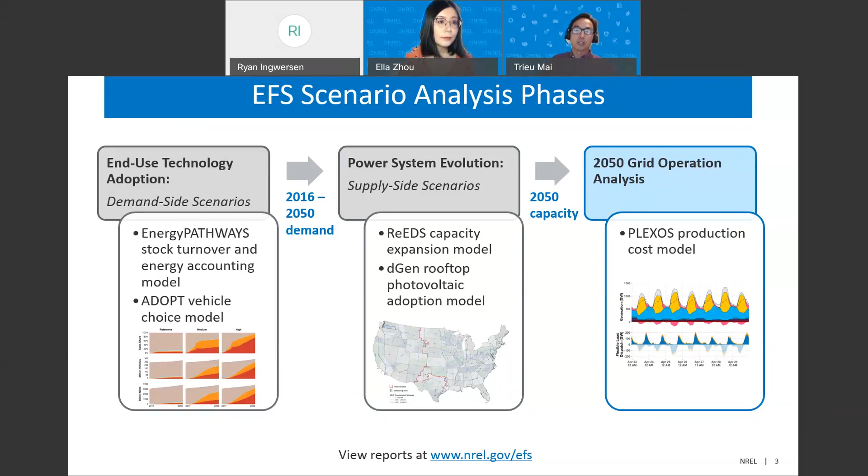And the purpose of the left-hand side here is because these long-term models necessarily need simplified representations of very complex things. So we're essentially modeling directly the unit commitment economic dispatch problem to handle the greater amount of renewable energy, greater amount of flexible loads on an hour-to-hour basis to examine some of the resource adequacy and reliability questions associated with these high electrification scenarios, as well as giving a better estimate of the value of some of these flexibility and integration questions. Okay, so that's the general flow.

I hope that was clear in terms of the linkages across all the modeling efforts and where it leads us to today. I wanted to also provide some quantification so you have some better context on what we mean by high electrification, what we mean by higher renewables and the like.

So starting with this chart, which is from our 2018 demand side analysis, you can see historical as well as projected annual electricity demand across all the sectors, industry, residential and commercial, and transportation. You can also see that what we refer to as high electrification at the very top there is largely driven, not entirely, but largely driven by vehicle electrification, at least on an annual electricity demand basis, such that overall demand reaches 6,700 terawatt hours by 2050, a significantly faster rate of growth than we've experienced in recent history, and especially compared to our reference scenario.

We don't model the medium scenario in today's analysis, so in the interest of time, I'm going to skip over the details there, but really it's those high and reference scenarios that we'll be looking at. Of course, power system planning and power system operations are dependent not only on the total amount of electricity demand in a year, but also the shape of that demand on an hour-by-hour basis, et cetera. So what we note here is in these high electrification scenarios, the impact is such that there are greater, sharper, and more frequent peak demands. This has a lot of implications for integrating renewables and the value of flexibility, including demand-side flexibility, which Ella will get into.

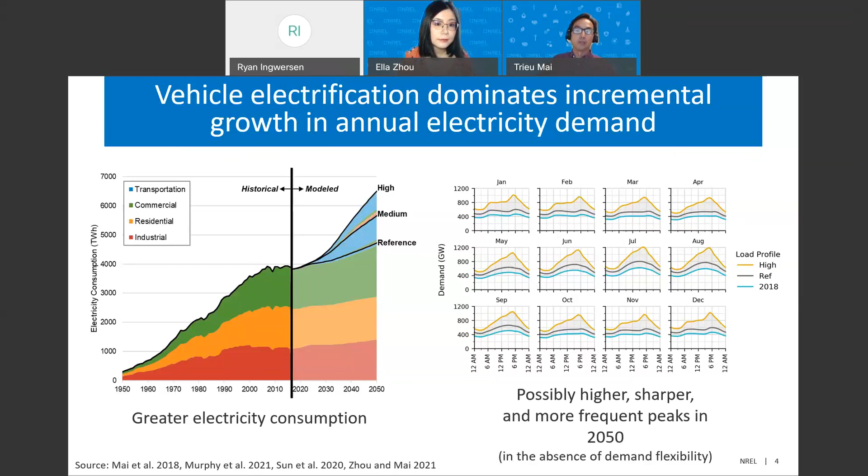A little bit more on the peak load, because the previous slide really emphasized vehicle electrification's impact on annual demand. We just want to note that, again, it's not just the annual values, and it's not just those total bulk numbers that are important, especially when looking at the operational aspects of electrification. So what's shown here is, from these high electrification scenarios, a shift away from just summer peaking demand to a wider range of peaks and a variable range of peaks across the seasons and months. And that's in large part driven by electric space heating needs under these high electrification scenarios, particularly in the northeastern regions and across the Midwest as well.

So what's shown in the maps is the magnitude of annual peak load. That's the size of the pie. The distribution of the pies are the top 100 hours and what season they fall under. And again, you see a shift in our model results from 2015 to 2050. A greater amount of blue in those pie charts represents a greater amount of winter peaking in those states, primarily in the colder latitudes in the eastern side of the country.

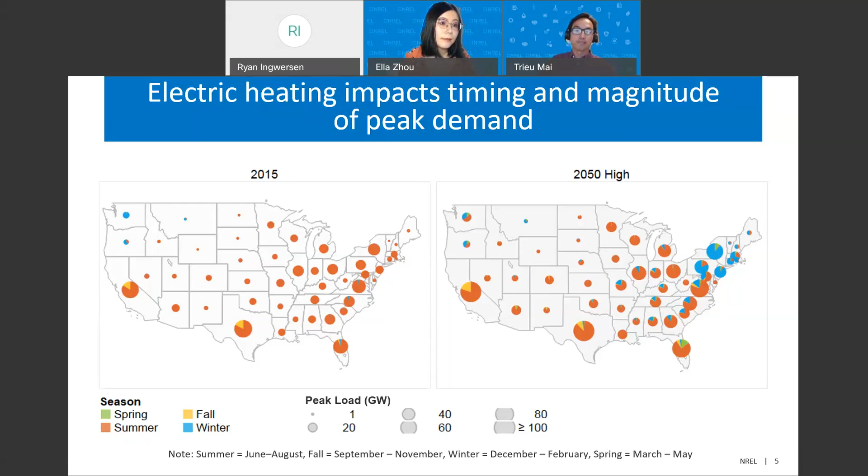Okay, so that's the demand side scenarios. What we're taking from the supply side scenarios is the generation capacity mix, as well as the transmission capacity developed and modeled using the ReEDS model. There are actually three main scenarios that we're looking at. Starting at the bottom is the reference scenarios. That's what REF stands for. And this is essentially our current policy scenario projected through 2050 using our moderate technology assumptions.

And from this scenario, you can see a substantial increase in wind and solar capacity, but also a substantial amount of existing and expansion of natural gas capacity in particular under these business as usual, if you will, environments. The next group of scenarios, the middle three there, labeled as high, refers to high electrification. And largely speaking, the capacity mix is very similar to the reference scenario, although the magnitude is much greater to accommodate the greater amount of overall electricity demand, as well as the greater peak demands as indicated there.

Finally, the top three scenarios are what we refer to as high RE. So high referring to high electrification, high RE meaning high amounts of renewable energy, predominantly from variable renewables. That's wind and solar in the blue and yellow there. The driver that we looked at to generate the scenario is using low renewable and battery storage costs from our Annual Technology Baseline. And not surprisingly, you get greater amounts of installed capacity in the renewables sectors, as well as in storage. You get a reduction in natural gas capacity relative to the high, standard RE scenario in the middle group, but nonetheless, you could see the differences there.

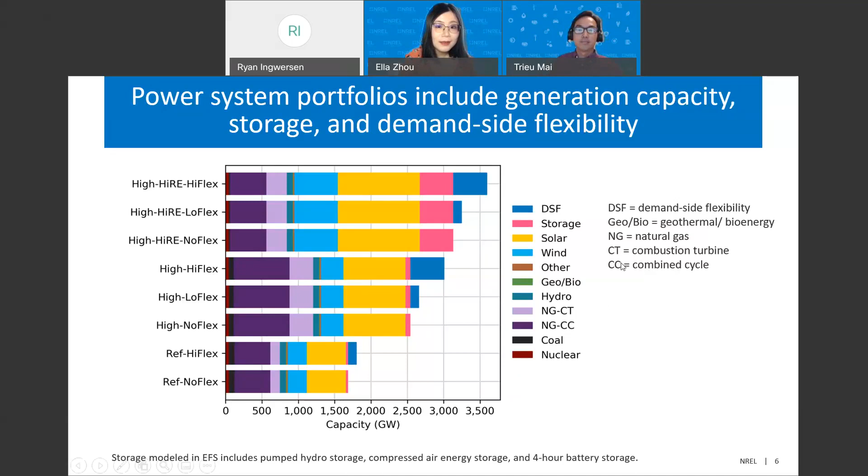Can you hear me now? Yes. Okay. Thanks, Trieu.

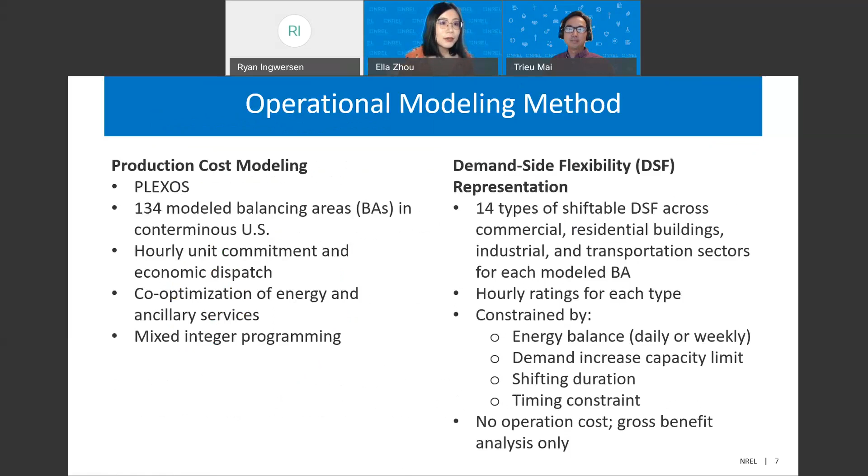So we use PLEXOS to investigate whether hourly electricity demand and operating reserves can be met, and the trends in electricity prices, regional power exchange, renewable curtailment, and other operational impacts. PLEXOS is a commercial production cost model developed by Energy Exemplar. For this study, we use PLEXOS to develop hourly grid simulations for the ReEDS system built in the previous EFS studies like Trieu has just introduced. It has the same geographical resolution as ReEDS, but with hourly unit commitment and economic dispatch and more granular representation of different types of demand-side flexibility.

Unit commitment and economic dispatch means determining when each unit will be on and off and at what level it will be operating for each hour under a range of physical and resource constraints to meet the electricity demand at the lowest operating cost. So we model 14 types of flexible loads. Here we can see a breakdown of the total annual 2050 flexible loads by sector in our high electrification, high flexible loads scenario. And it amounts to about 17% of the total load.

Similar to energy storage, demand-side flexibility in our model can shift energy consumption from one hour to another, and it can provide operating reserves. But it is also different from storage in that it is constrained by a variety of factors, including the time series availability, the fact that end-use service must be provided at the end of the day or end of the week, and other specific demand constraints.

For example, let's say I have a water heater. I probably don't care if it kicks off at 4 in the morning or 6 in the morning, but the service has to be provided at some point of the day. Otherwise, the result is I won't have hot water for my shower. So demand-side flexibility is a lot more restricted than storage. Even though we see 17% of the load being flexible on an annual basis, they're not actually available all day, every day, and when we actually want it.

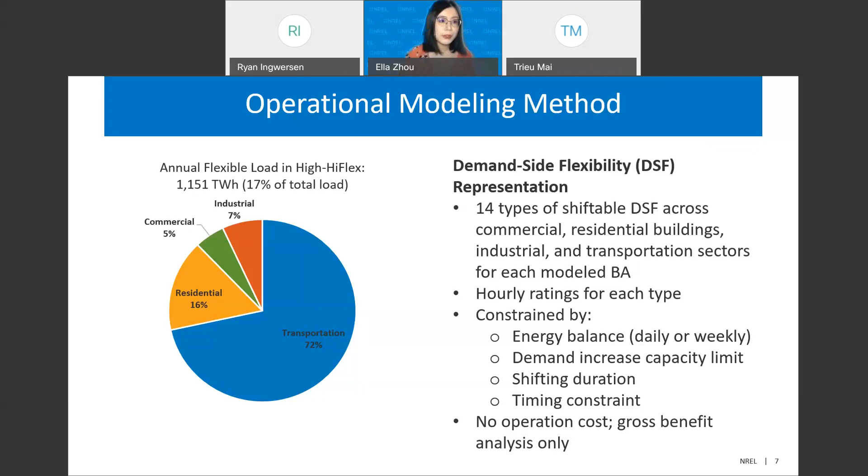We have three research questions we're focused on. The first one is, how do future power systems operate to serve electricity demand with new and changing loads from widespread electrification? For this question, we'll look at the scenarios with varying levels of electrification, but without demand-side flexibility. The second question is, how might flexible loads be dispatched and how do they impact system operation? For this question, we'll compare the high electrification scenario with and without demand-side flexibility to see how that works.

The third question is, how do flexible loads operate in high renewable, high electrification futures, and what's the value of their flexibility? So for this question, we'll compare scenarios with two levels of renewables, 43% and 66% nationally, and see how flexible loads work in concert with the renewables.

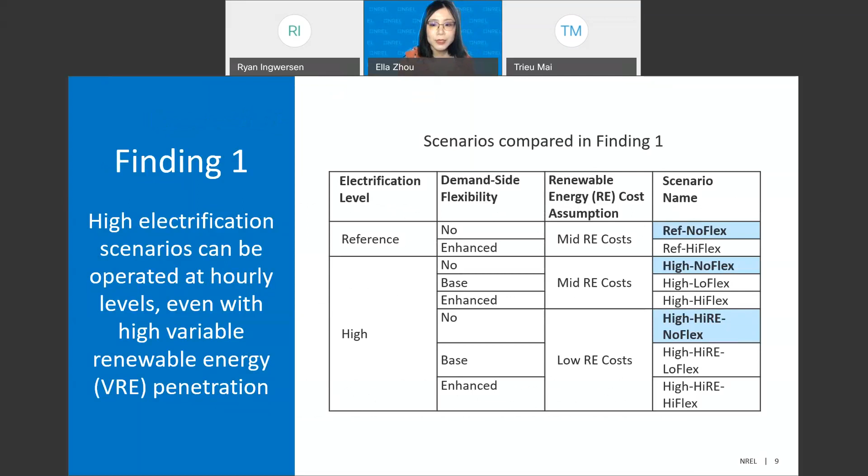The answer to our first question is yes, high electrification scenarios can be operated at hourly levels, even with high variable renewable energy penetration. The table here highlights the scenarios we're comparing in this section, which is the reference electrification, high electrification, and high electrification, high RE without demand-side flexibility. The modeling shows that the portfolios built in ReEDS are resource adequate. It can serve more than 99.99% of the load and 99.96% of the operating reserves at hourly resolution in all 2050 scenarios.

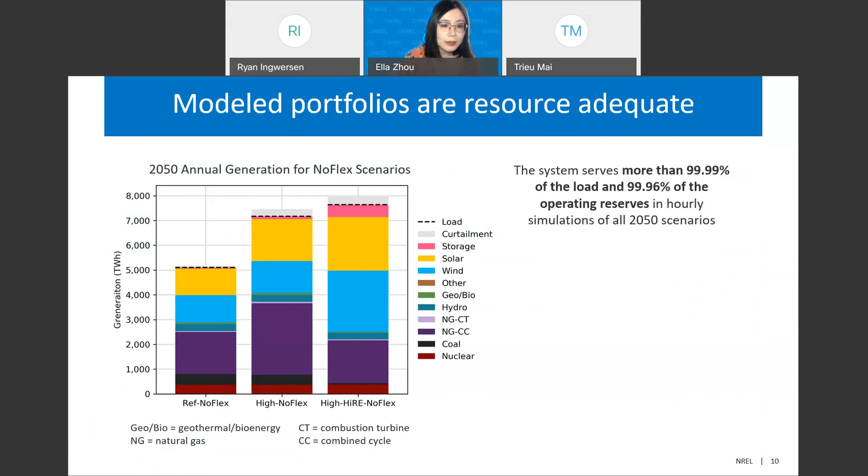And on the left figure, hold on. I want to get my pointer.

Okay, there we go. On the left figure, it shows the three annual generation bars from our modeling results: reference electrification, high electrification, and high electrification, high RE without demand-side flexibility. Variable renewable energy, which we define as wind and solar PV, amounts to an annual average of 66% of generation in the conterminous United States in the high and the high RE no flex scenario.

But this by no means implies that's the highest renewable penetration the system could achieve, because low carbon and other scenarios, for example, can drive even greater renewable penetration. For our purposes, the study demonstrates that the system can serve the load and operating reserves at hourly timescale under high electrification and relatively high renewables.

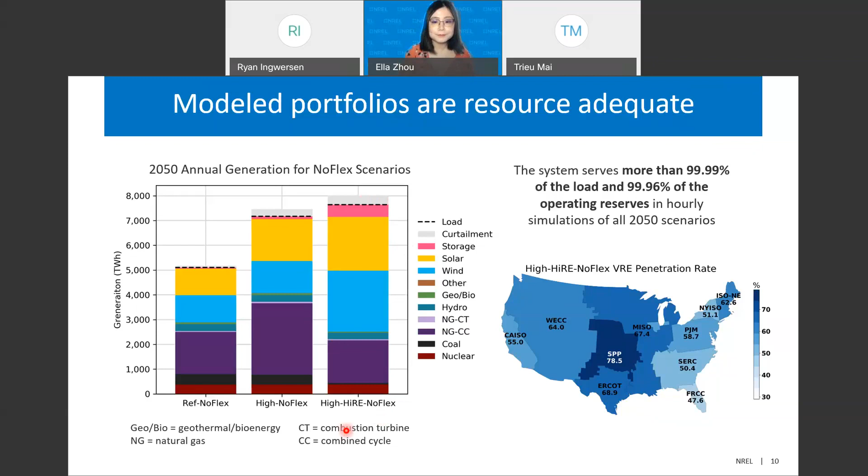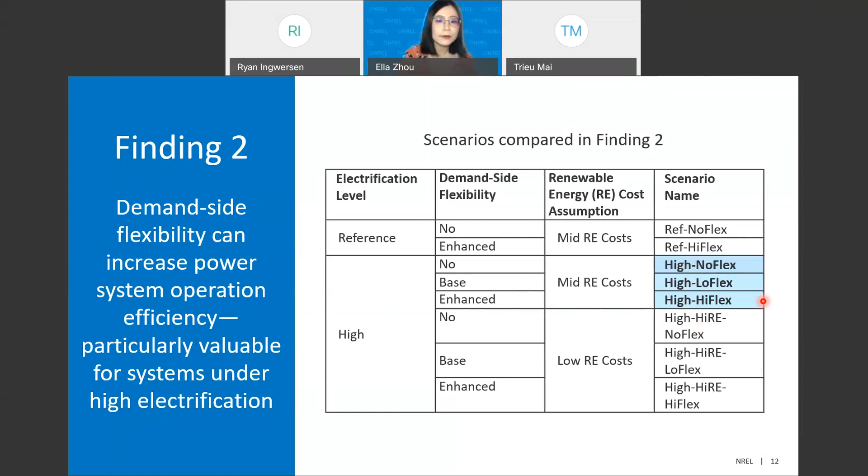Demand side flexibility increases power system operation efficiency and reduces system operating costs, primarily by increasing demand during low price periods and decreasing demand during high price periods. This load shifting helps increase utilization of generators with low operating costs and avoids turning on higher cost units.

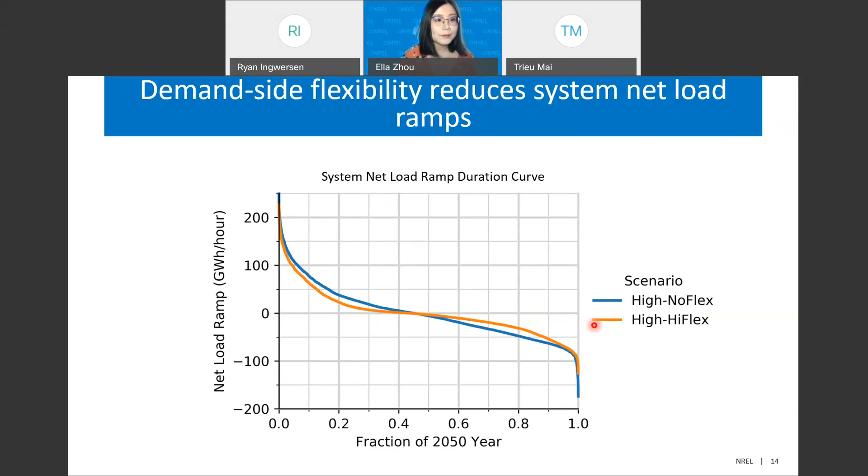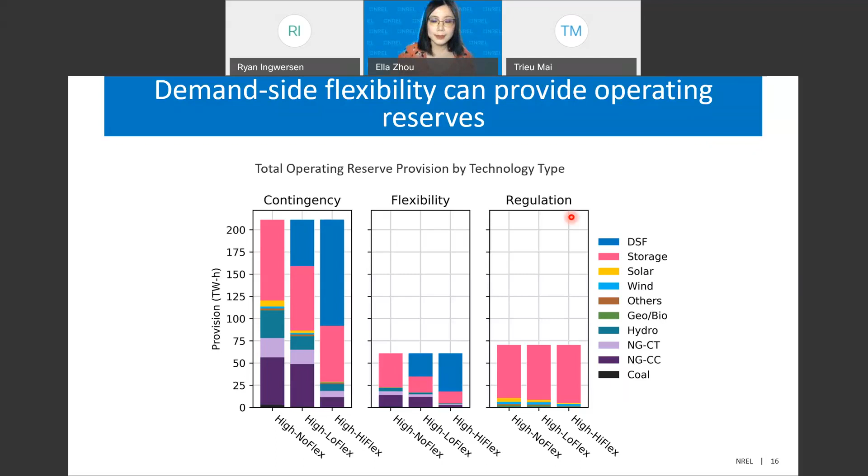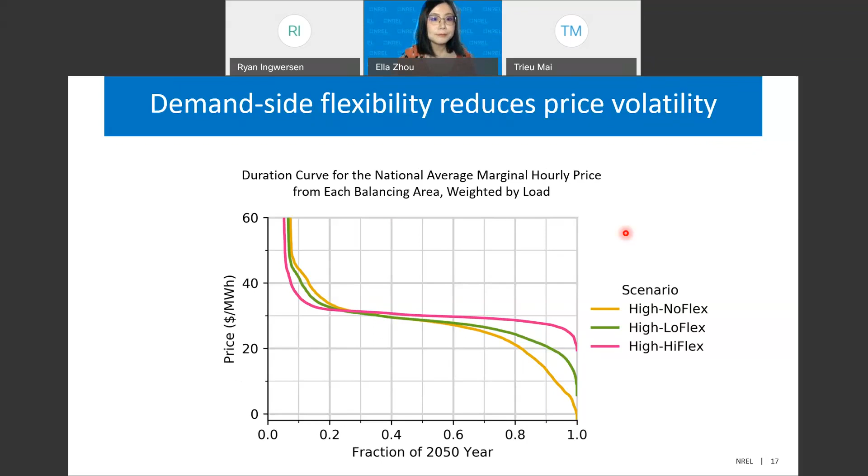Do we have any clarification questions? No, I think there are some questions about assumptions around flexibility, but I think it'd be better to group them at the end. So please proceed. Okay.

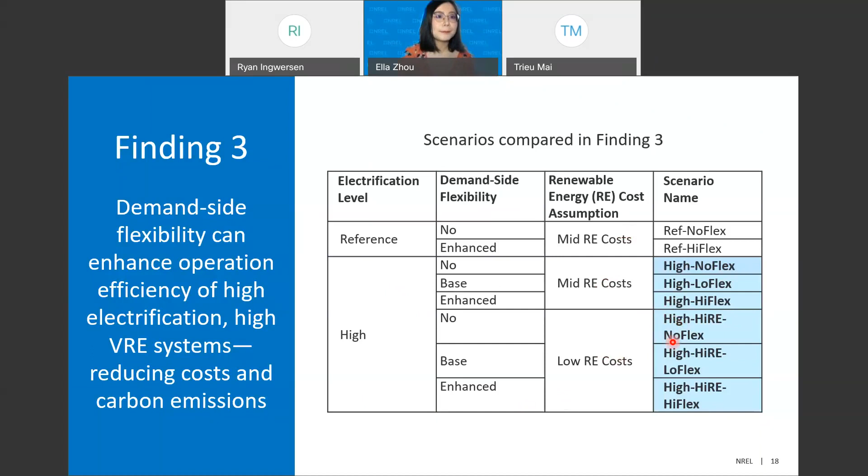So our third finding is that demand-side flexibility can enhance operation efficiency of high electrification, high VRE systems, reducing costs and carbon emissions. For this one, we're looking at only high electrification scenarios with different levels of renewable energy and different levels of demand-side flexibility. We find that flexible loads can reduce renewable curtailment. The average post-curtailment national VRE penetration in the high electrification scenarios is around 43%, and in the high electrification, high RE scenarios around 66%. A lot of curtailment happens in the springtime, when the demand is low. And in both sets of scenarios, the addition of demand-side flexibility can lower curtailment.

So the top figure shows the high electrification scenarios with varying levels of demand-side flexibility. The bottom figure here shows the high electrification, high RE scenarios with varying levels of flexibility. So you can see with additional flexible loads added, curtailment always goes down. In total, high levels of flexible loads can reduce curtailment by around 16 to 18% in these scenarios.

But the spring curtailment, as you can see, remains pretty high because only daily shifting or weekly shifting demand-side flexibility is considered in our modeling. This suggests that maybe longer duration sources of flexibility, such as long duration storage or electrolytic hydrogen production, might have potential here depending on their costs.

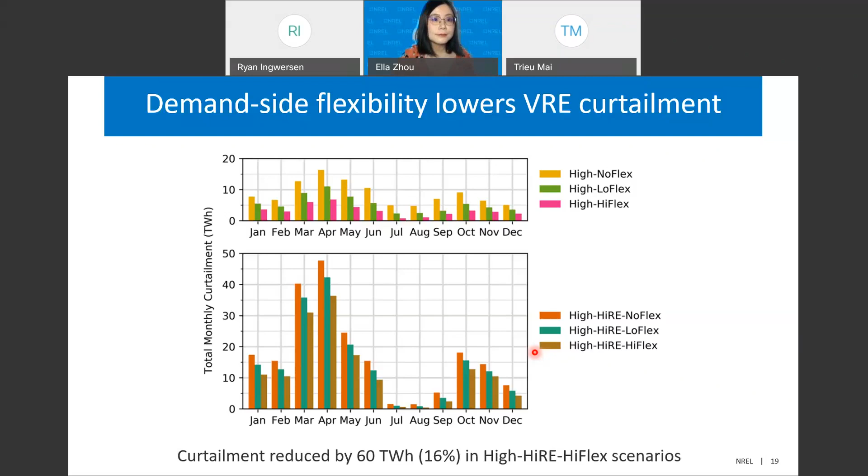Overall, we see that demand-side flexibility can effectively lower system operation costs by using more efficient units, reducing VRE curtailment, reducing system net load ramps, and thermal cycling. This amounts to around 9% of total system operation costs in the high electrification scenario and 10% in the high electrification, high RE scenario. Note that the high electrification, high RE scenario in itself is less than half of the total operation cost of the high electrification scenarios, mainly because of the savings in fuel costs.

The gross value of demand-side flexibility, without accounting for costs of implementing and operating it, is around $4 to $16 per megawatt hour of availability, and that is the total system saving divided by the total annual amount of available flexible load. Or the value could be $8 to $22 per megawatt hour of energy shifted. So that is the total system cost saving with demand-side flexibility divided by how much energy is actually shifted during that year. This value of demand-side flexibility diminishes as additional flexibility is added.

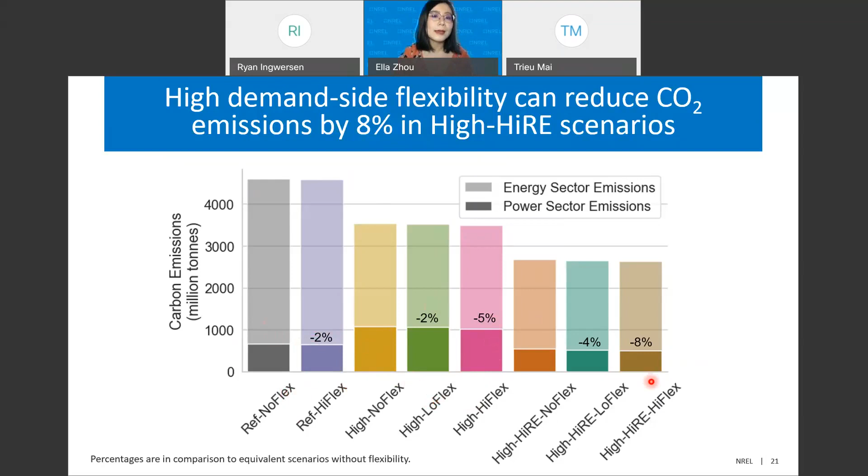We find that flexible loads can enhance the ability of VRE to lower CO2 emissions in electrification futures. The percentage differences marked here are in comparison to equivalent scenarios without flexibility. So this one is saying reference electrification with high flexible loads can reduce emissions by 2% compared with reference electrification without flexible loads. And high flexibility reduces emissions by 5% under high electrification and 8% under high electrification, high RE scenarios.

Overall, we find that the study shows that the U.S. power system can operate under systems with widespread electrification with high amounts of variable renewable energy. And then we have 1.3 terawatts installed capacity, 66% of annual national generation.

Demand-side flexibility, which is dominated by electric vehicle charging under high electrification, can enhance operational efficiency by reducing system ramps, reducing thermal plant cycling, and increasing utilization of more efficient generators, resulting in a gross benefit, that is without accounting for the cost of implementation, of $8 to $22 per megawatt hour of energy shifted, or 4 to 16 per megawatt hour of available flexible load.

The complementary relationship between demand-side flexibility from newly electrified load and variable renewable energy is particularly pronounced. Flexible loads can reduce renewable curtailment and thereby reduce power sector CO2 emissions, resulting in up to 10% of total system operating cost savings and 8% emission reduction in the high RE, high flex scenario compared with no flexibility.

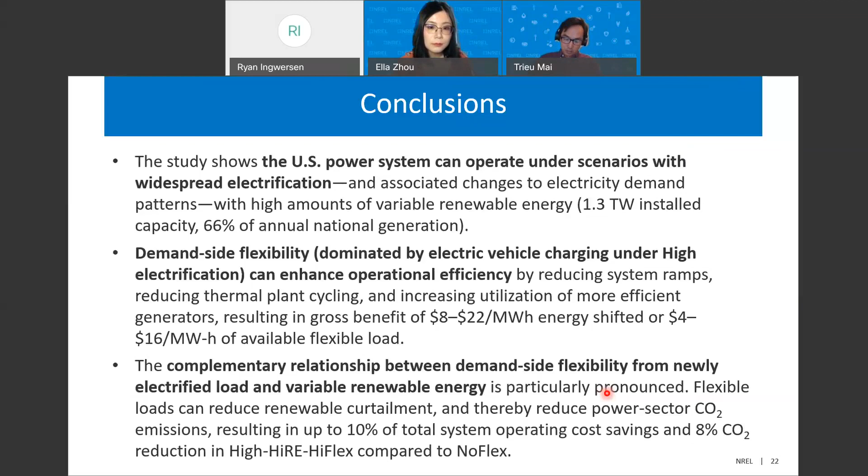Because storage is not as constrained as our demand side flexibility. So in a lot of ways, I think if we are looking at a megawatt to megawatt basis, storage definitely offers more flexibility. But we are seeing demand side flexibility taking a lot of the solar power generation during the middle of the day and then contributing to meeting the evening demand and then evening and morning ramps here. So in that way, I think it's very complementary to what storage is doing,

but it does replace some of that diurnal shifting. But because storage does not have the weekly or the daily balancing constraint or the hourly profiles as demand side flexibility has, storage will be able to, for instance, maintain a state of charge for longer durations. So storage definitely has an advantage there.

Yeah, thanks, Ella. I should expand on my previous comment a little bit more: we did see in the prior analysis that there was a trade-off. If you had more flexible load, your storage deployment would be more limited. And what Ella is mentioning is there are shared grid services between storage and flexibility, and therefore there's some competition and reduced need for one if you have the other. And I should expand that beyond just storage and demand side flexibility to other sources of grid flexibility. So an important set of trade-offs to consider.

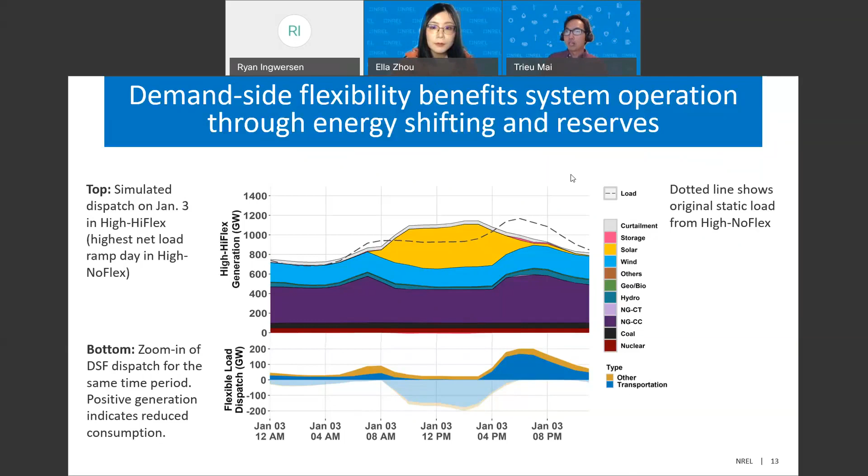Things change quickly in the energy world, as we all know, and so these kinds of annual updates will help us refine some of the insights here, as well as extend the scenario analysis to questions around what happens if you have deeper decarbonization, what happens if you have different kinds of clean energy policies.

The Annual Technology Baseline is another one of our annual products that recently was extended to include the transport sector and extended beyond electric options. So please do use that resource. We're hoping, pending support from our sponsors, to extend that even further to other sectors. So super valuable for this kind of analysis.